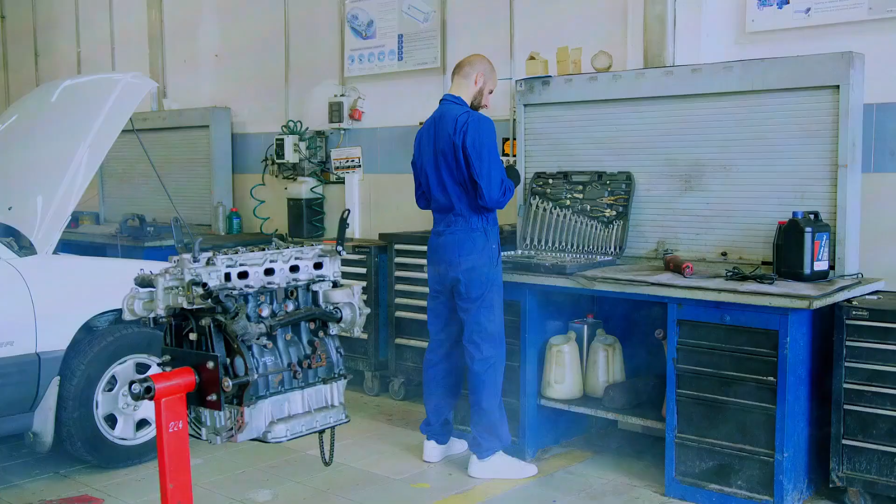Today's engine trouble code is P0060, which indicates a problem with the heated oxygen sensor (HO2S) heater circuit on bank 2 sensor 2. Don't worry, that sounds complicated, but we'll break it down and see if it's something you can fix yourself.

Before we dive in, let's understand what this code signifies. Your car has oxygen sensors that monitor exhaust gases. These sensors have heaters to bring them up to operating temperature quickly. P0060 means the heater circuit for the oxygen sensor on bank 2 sensor 2, usually the downstream sensor after the catalytic converter, isn't working properly.

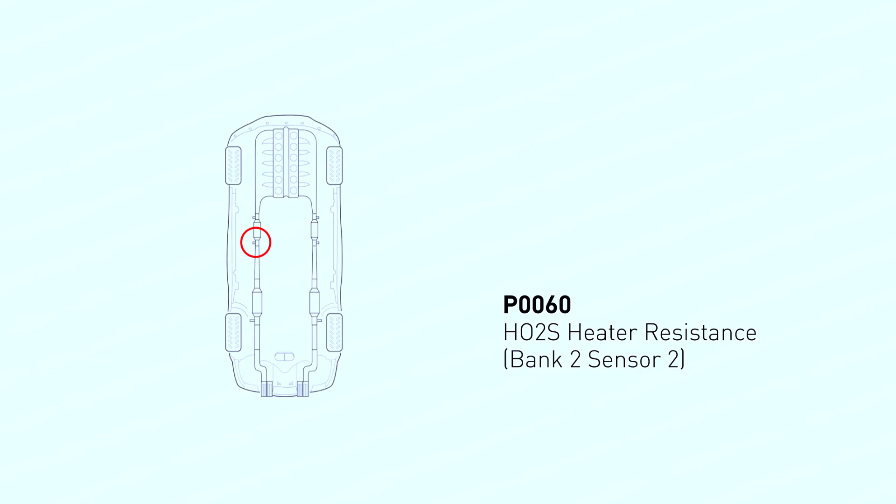Here are some signs to watch out for: illuminated check engine light, decreased fuel efficiency, increased emissions, rough idling, and reduced engine performance.

Tools you'll need: wrench set, socket set depending on sensor location, multimeter (optional, for testing), and a replacement oxygen sensor. Consult your car's manual for the right part.

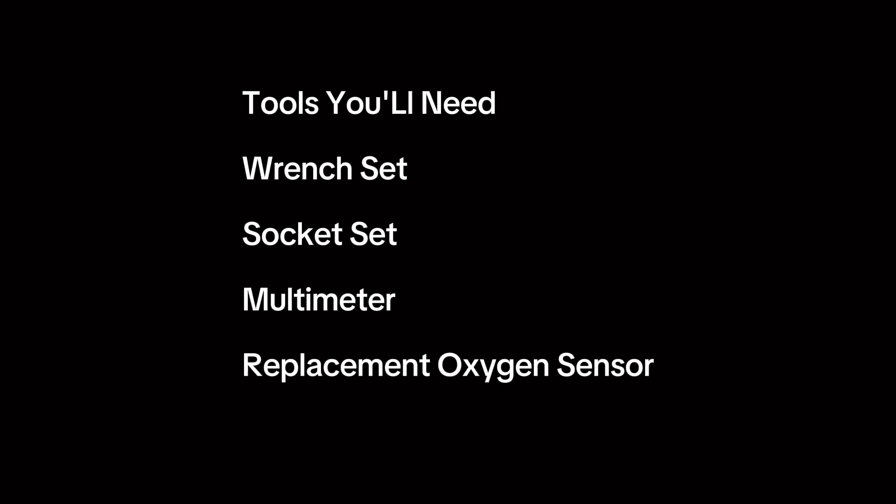Safety first. Always work on a cool car and park on a level surface. Disconnect the negative battery terminal for electrical safety.

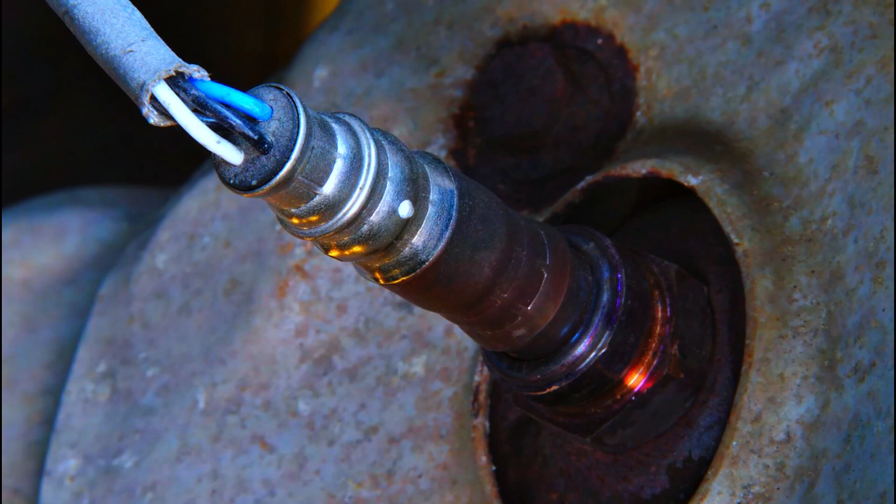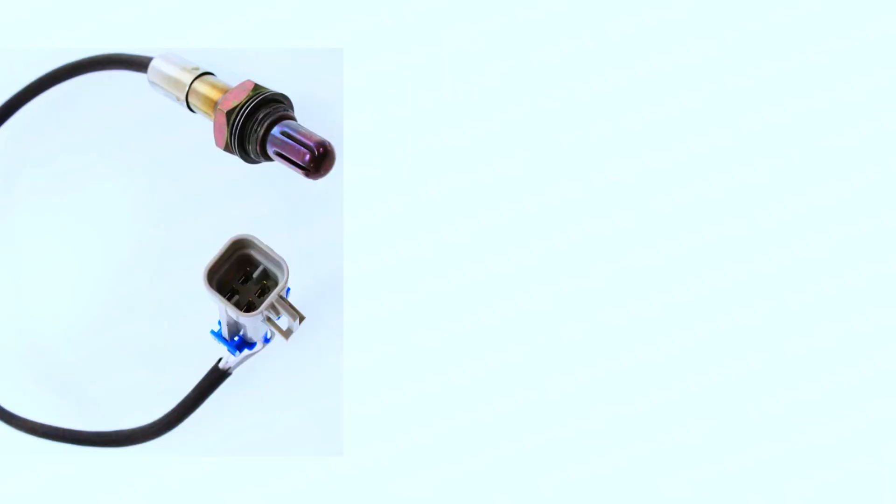Before diving in, check for any loose or damaged wiring around the oxygen sensor. Look for exhaust leaks near the sensor as well, which can mess with readings. If the wiring seems okay, we can suspect a faulty sensor or a blown fuse. Consult your car's repair manual to locate the fuse for the oxygen sensor heater circuit and check it with a tester.

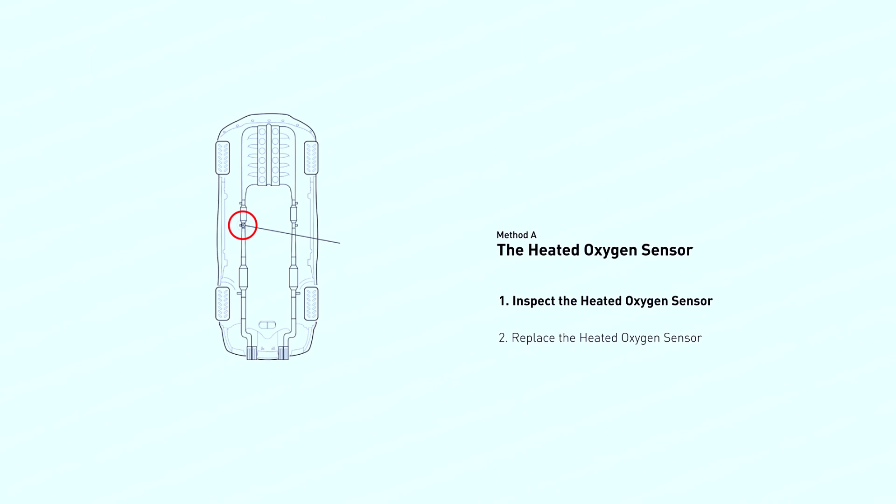Locating the sensor: refer to your car's repair manual to find the exact location of bank 2 sensor 2. It's usually screwed into the exhaust pipe near the catalytic converter.

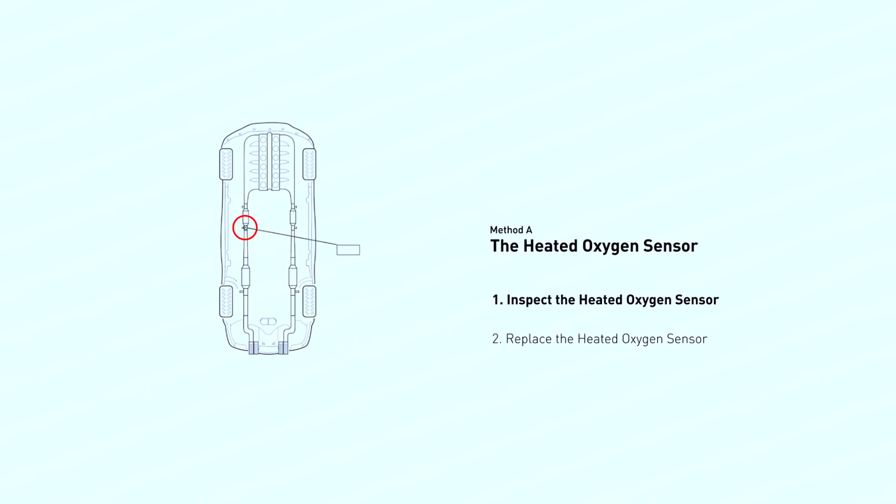Visual inspection: once you find it, check the wiring harness for any damage or corrosion. Look for burnt or melted connectors. If the wiring seems okay, we can move on to the next step.

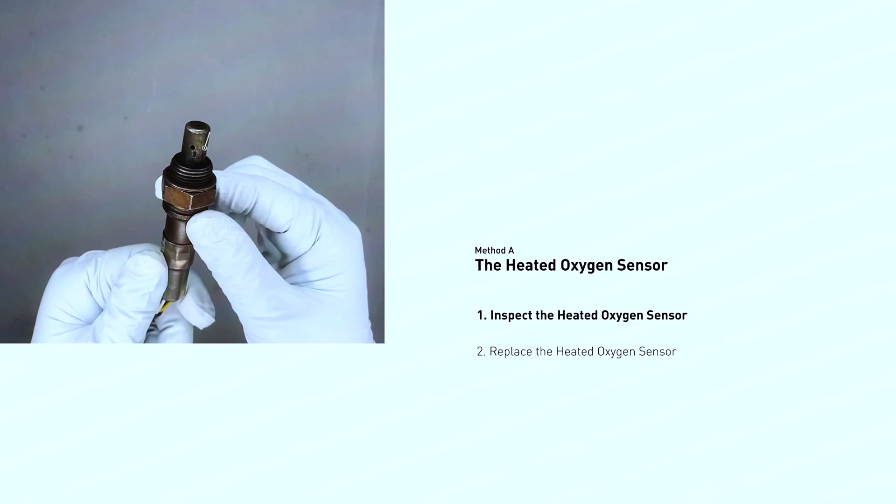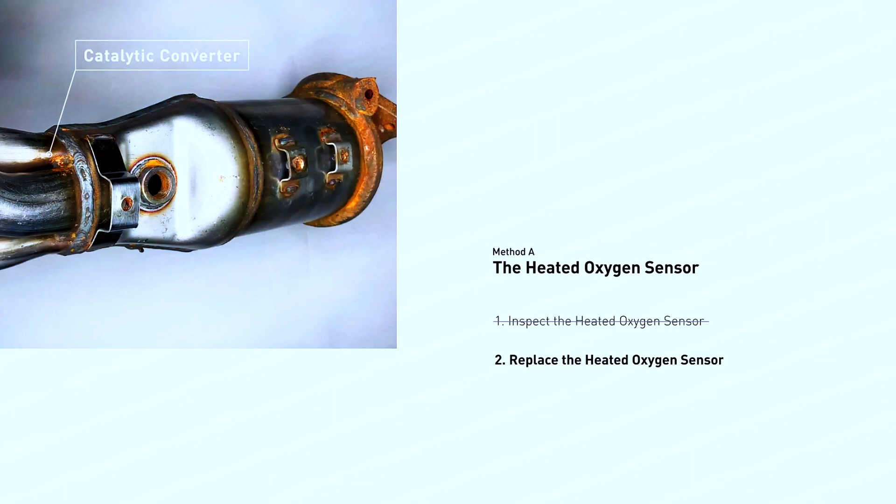Replacing the sensor: use the appropriate wrench or socket to remove the faulty sensor. Be careful, it might be tight. Screw in the new sensor hand tight first, then tighten it with the wrench following the recommended torque specifications. Refer to the manual, then reconnect the wiring harness.

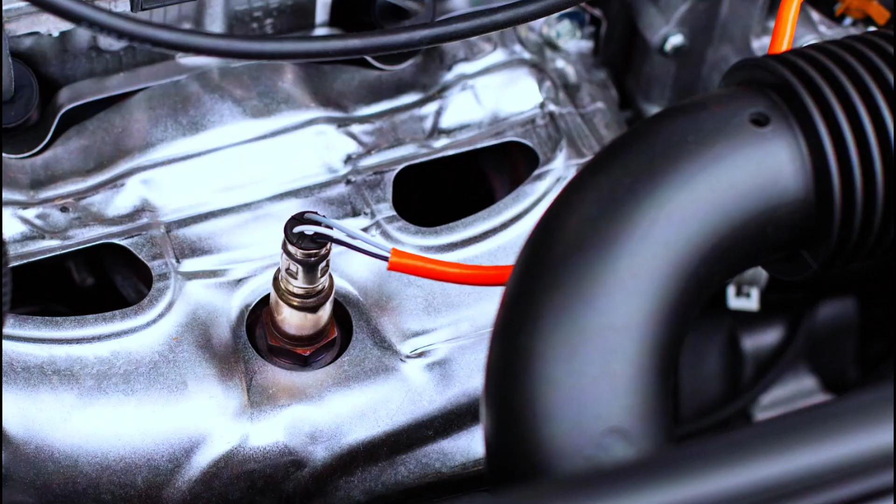Once you've replaced the sensor or fixed the wiring, use your OBD-II scanner to clear the P0060 code. Then test drive your car and see if the code comes back.

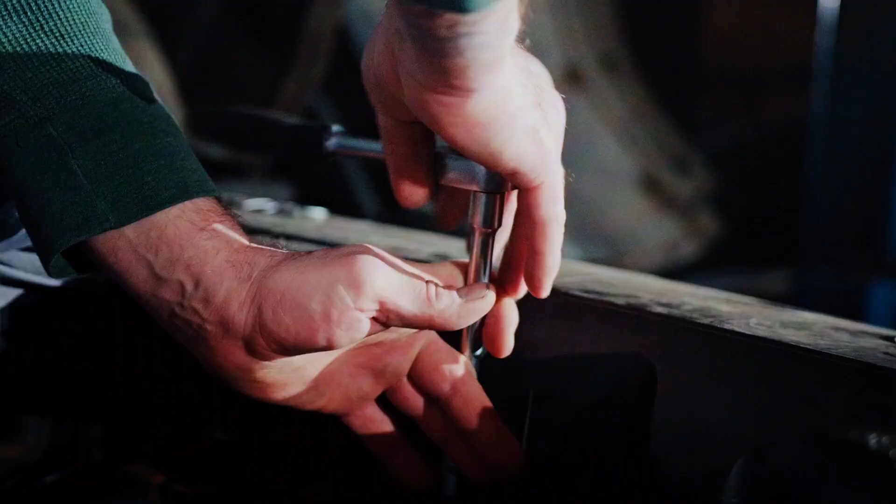If you're not comfortable replacing the sensor yourself, or if the fix doesn't clear the code, don't hesitate to take your car to a trusted mechanic. They can diagnose the problem accurately and get your car running smoothly again.

Thanks for joining me. I hope this video helped you understand and potentially fix the P0060 code. Remember, if things get too complex, a mechanic is always there to help.